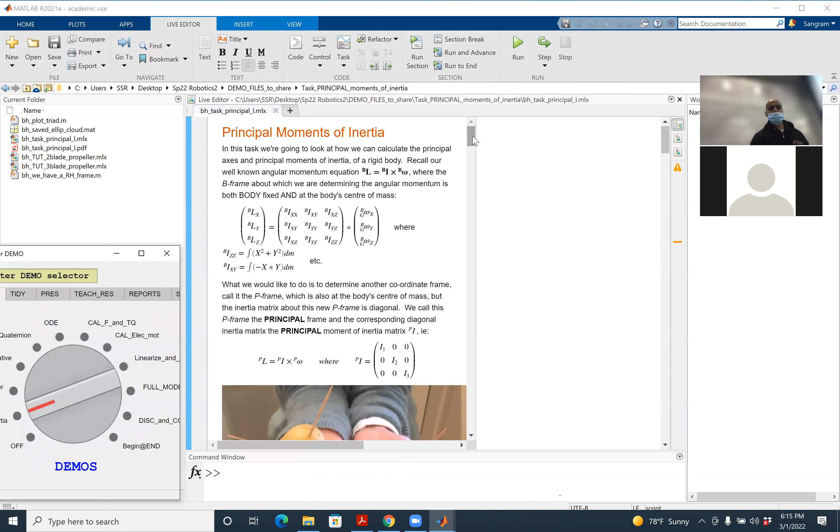This live script talks about the principal moments of inertia. So we have covered the inertia tensor. We have covered principal moments of inertia. And here is a nice sketch that talks about what do we mean by principal moments of inertia. There are two potatoes. One axis is aligned with the axis of potato, and the other axis is at an angle to the principal axis.

Now this live script, what you can do is you can interactively run. So what that means is if you go down, you can actually click here, run section, and the script would run onto the right-hand side. So you will see the equations for the moment of inertia. So if you want to find out the principal moment of inertia for an arbitrary object, what you do is you solve something called the eigenvalue problem. And then that gives you the principal moment of inertia.

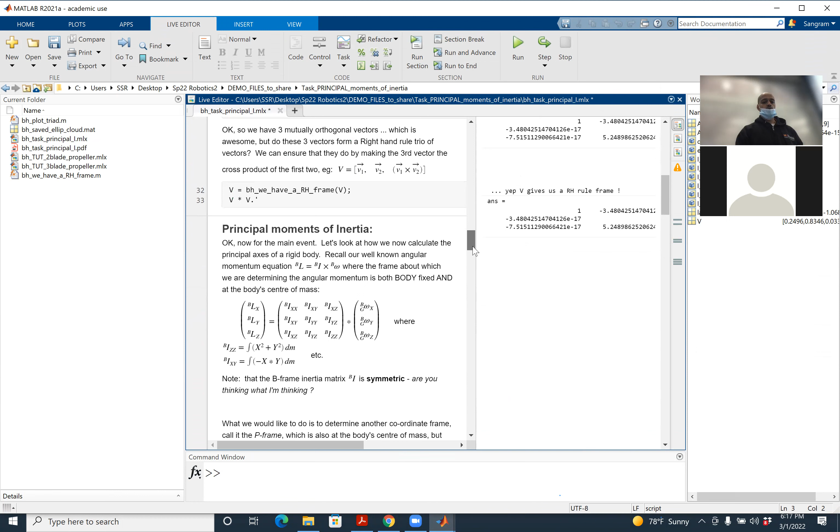And then if you go down, it gives you a little bit more information about the eigenvalue problem and what that is, what do we mean by principal moment of inertia. So this is talking about the frame. Another important point that I want to talk about, and I emphasize this when we discuss, look at the angular momentum equation. Angular momentum equation is the moment of inertia multiplied by the angular velocity vector.

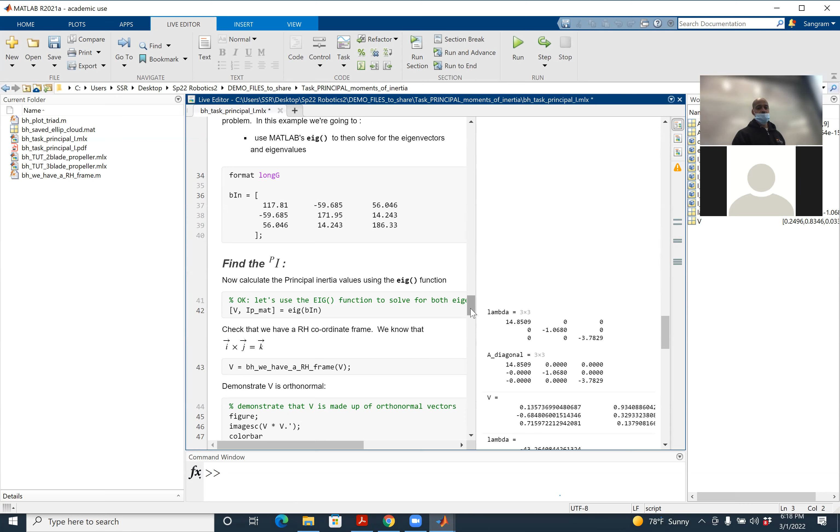So basically, if you want to try this in MATLAB, you can run this code in MATLAB. And there is an eigenvalue example. There is also another example. Remember the circle of vectors that I talked about, i cross j, j cross k is equal to i. All that information is encoded in the live script. And you can run these live scripts over here. And this also talks about the unit vector and other stuff.

Are you with me so far? Have you opened this? Is it on? No. Still extracting. Yeah, that's all right.

Now, if you don't like to watch this live script, actually there are movies also embedded. What you can do is you can go to reports, click on the principal inertia, and that will bring a PDF file that will give you the gist of what principal moment of inertia is, what is the application of principal moment of inertia, and all that stuff. Everyone understood this?

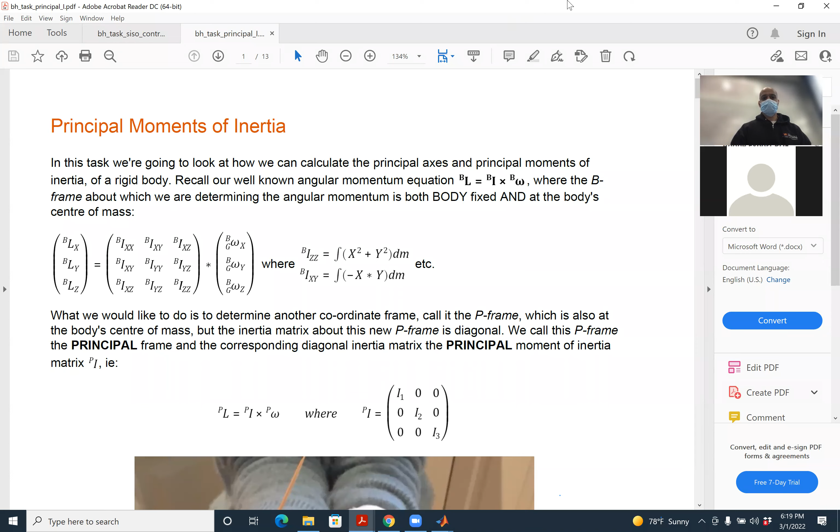So what else did we study? We looked at Euler angles and what Euler angles are. We talked about passive rotations. We talked about how rotations are not commutative.

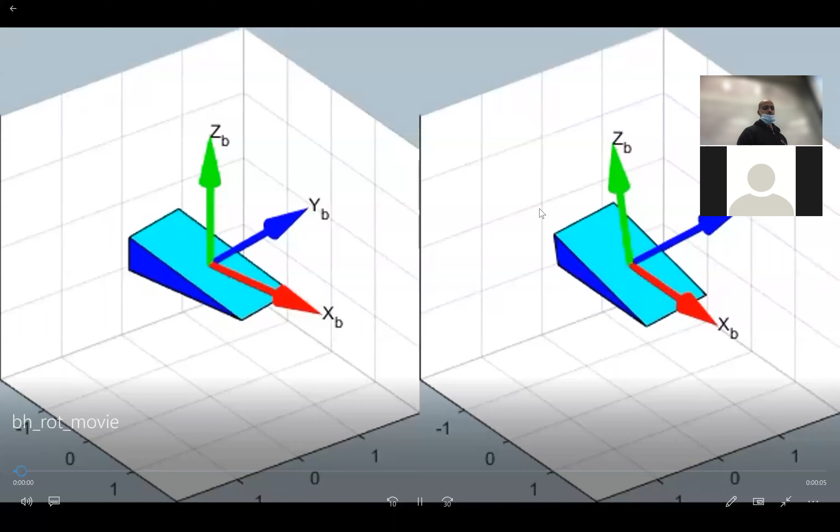So this script talks about what we mean by non-commutative rotation. There is a movie embedded in here. So basically you are applying the same rotations, but in a different sequence. The same rotations in a different sequence give you a completely different result because the rotations are not commutative. Are you with me so far?

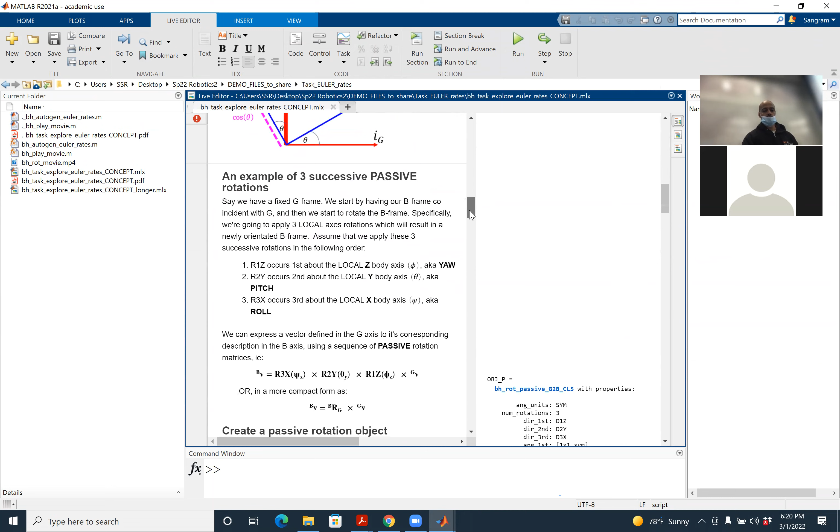Now, remember the transformation matrix that we talked about? In this live script there is code that you can use to create the rotation matrices. Remember we talked about Z, Y, X: rotation about the Z axis, rotation about the Y axis, rotation about the X axis. That takes us from the inertial frame to the body frame. So all the transformation is actually implemented in MATLAB.

And some of you may ask me, why are we learning this again? It is super important because towards the end of this lesson, you can actually take the Simulink code, convert that into C code and flash it onto a microcontroller. Before we do that, it is absolutely essential that we have an understanding of the math that is involved. And it's fun.

So remember all these transformations that we talked about: the rotation about the inertial frame, then the rotation about the middle frame and the rotation in the body frame. You are welcome to run these live scripts, and finally you would get the relations that we derived in the third class. So this is done in MATLAB. And then we found the relationship between the body rates and the inertial rates. And when the pitch angle is 90 degrees, the system becomes singular.

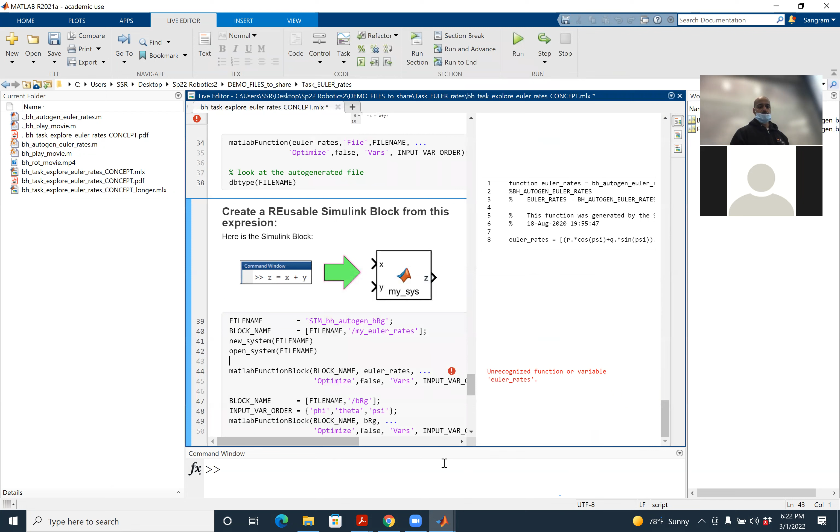So for example, this Simulink function will actually implement that transformation. Give it some time, it will take a while, but this will come up. So you are welcome to try this. So we looked at the rotation transformation, and this is what's going to happen later: we have this quadcopter model. It could be a Parrot Mambo, or it could be a Tello, or it could be a Parrot AR drone.

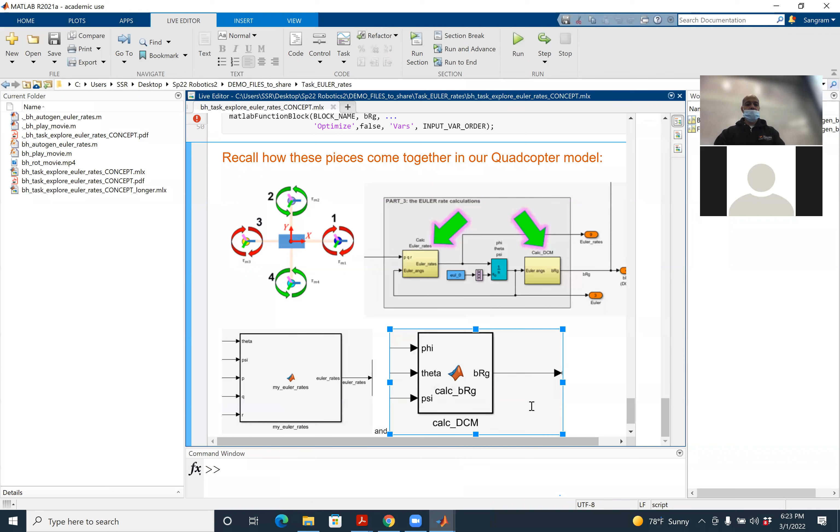What we have is a Simulink block, and we are going to get the roll rate, pitch rate, and yaw rate, or essentially the body rates, PQR, from the IMU on the drone. That information will get fed into the Euler angle transformation, and then we will use a direction cosine matrix transformation to find the actual roll, pitch, and yaw. So please understand, this is what your code will look like. You will have Euler rates, and then you will have a DCM.

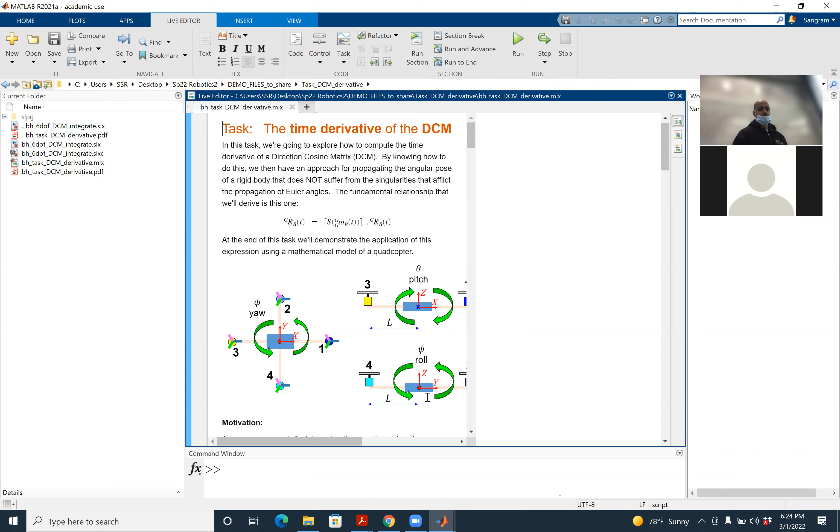The next part that we talked about is the derivatives, or how we actually find the angular velocities. For finding angular velocities, a simple structure is you have the yaw rotation, pitch rotation, and roll rotation. So we talked about those. We also talked about the transformation from the inertial frame to the body frame. Now here, the key concept is how you find the derivative of the rotation transformation, because the angles are also changing.

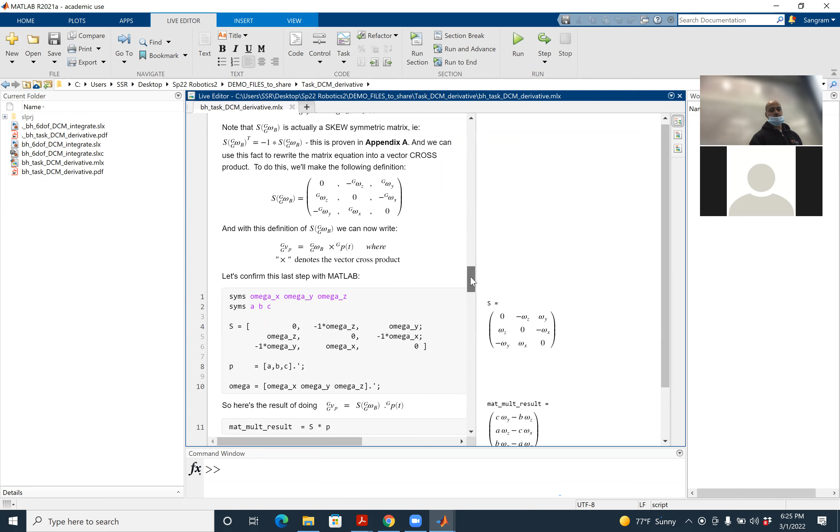And why is this important? This is important because when we apply Newton's laws, the equations of dynamics, we will have to use this information. And this comes with the cross product. So I would encourage you to run this script, and you will see the cross product of the transformation. And then finally, you will see the Simulink implementation. This implementation is going to go and sit in the drone. So please read through that and understand how this implementation is done.

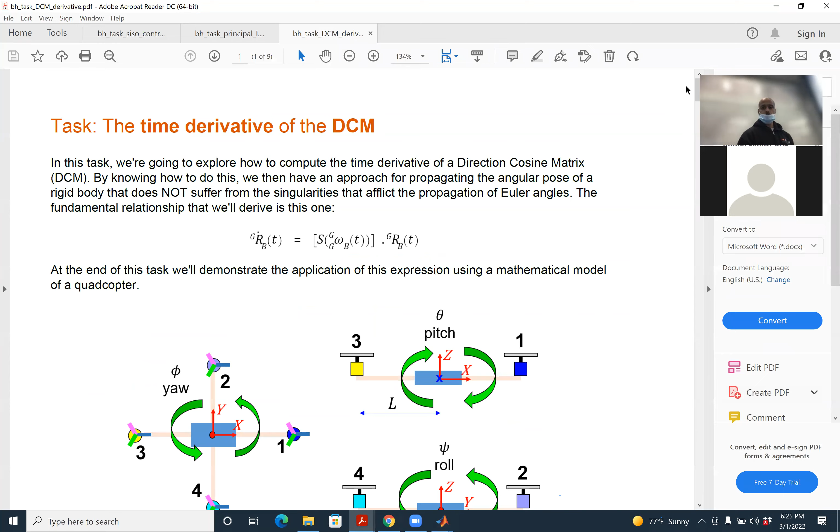So when you open this, it will talk to you about all the important concepts that are needed to run this. We did not talk about the quaternions, but really, if you want to get into flight dynamics, quaternions is the thing to work on. And the idea is we don't have to rewrite the code for quaternions. MATLAB already has the built-in block for the quaternion that we can use and implement the quaternion implementation.

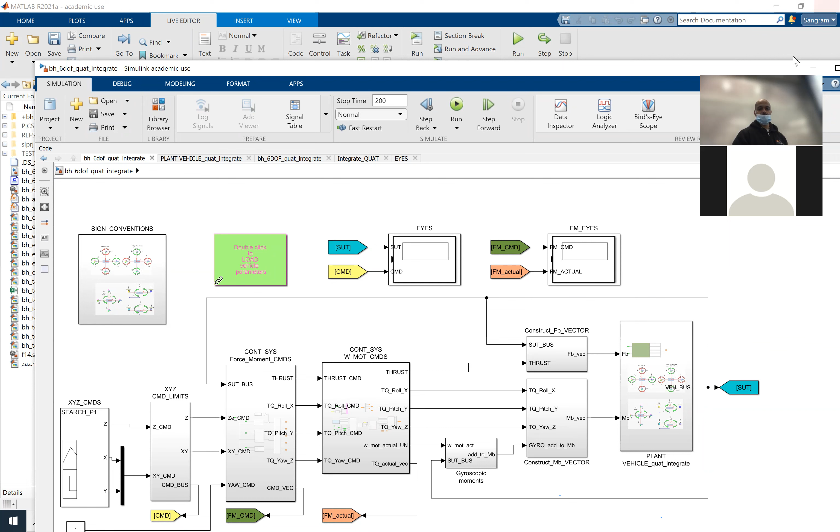So if you go down, you can actually open the system. So if you run this section, it will open this 6 degree of freedom quaternion block, and then you can actually use this in your code. So this is how that whole thing looks like. You have the sign convention, you have the reference value, you have the command limits, and all that actually goes to the plant. And we are gonna look at that in step-by-step fashion. So I would encourage you strongly to go through this and explore this architecture.

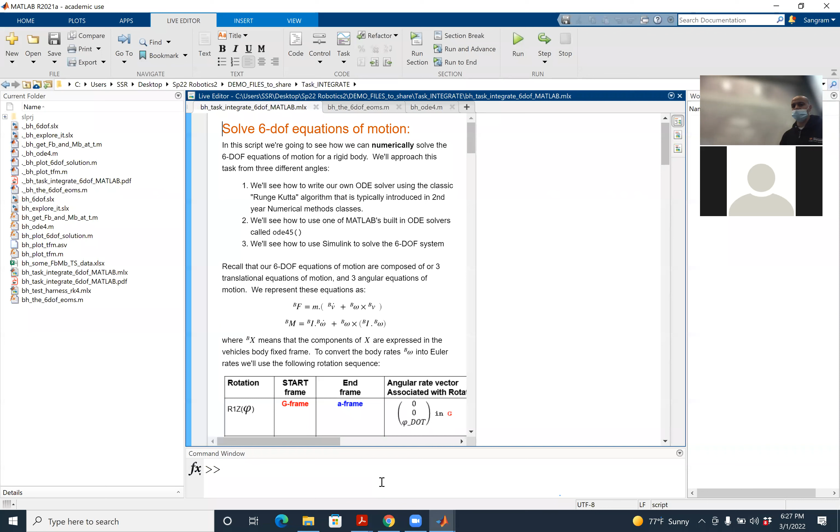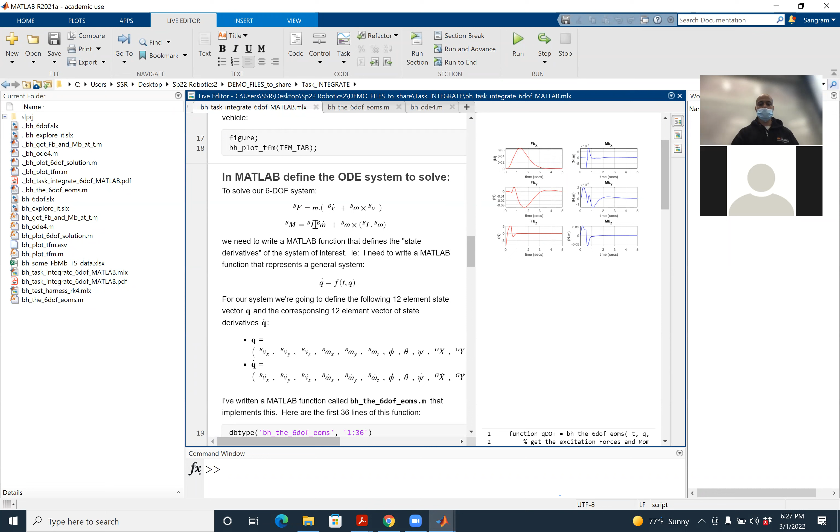Next part is the ODE part. And this is the crux that we spent a lot of time on. I spent 2 lessons talking about the differential equations of motion. This MATLAB script gives you hands-on implementation of what different frames are, how to use the mass inertial properties, how to get these properties in the body frame. Remember these 2 equations that we talked about, the derivative of vectors. So you have a force equation and you have the torque equation. And at the end, you have torque about roll, torque about pitch, and torque about yaw that are used to control the drone.

Now, this is the hard-coded Runge-Kutta implementation, which is the 4th order numerical integration. You can use this code or you can use the actual MATLAB code and then generate the results. And you're welcome to run these scripts. And at the end, you have the quadcopter model. This quadcopter model is implemented in a MATLAB function block in Simulink, which is the body Euler angle fixed mass, and you supply all the inertia properties for the quadcopter. This is super important. You supply the values of forces, Fx, Fy, Fz. You supply the torques, Tx, Ty, Tz to this block.

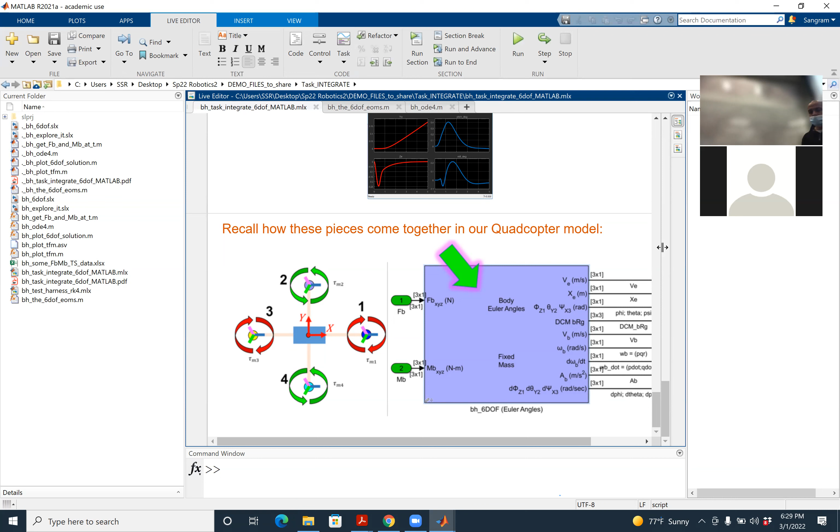And then on the right hand side, you are gonna get those 12 state variables. Remember velocity, position x, y, z, and then orientations and angular velocity and all that type of stuff. And that becomes the output of your simulation. So please run these scripts and that would make your understanding super clear.

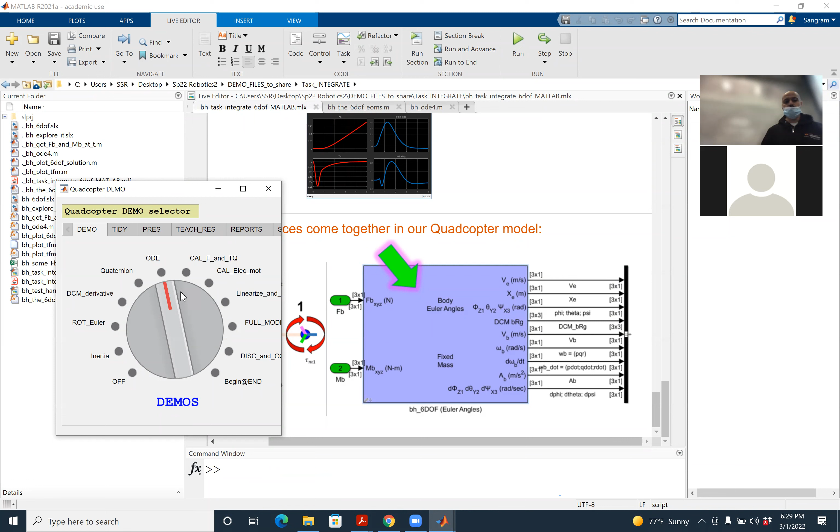The next part is, all this is great, but how do we find out the actual forces and torques? To find out actual forces and torques, we need to do some experiments. So we basically mount a prop on the motor, run the prop at different speeds, measure the thrust, measure the torque, and create an equation using some sort of regression that is used in our control algorithm. So please run through this code, and you can actually use the Curve Fitting Toolbox to find out the equations.

Now, I just want to tell you, this approach is so powerful. Let's say you decide, hey, I want to build a quadcopter from scratch, you can actually follow this technique. This is called model-based design. You can select the motors, do the step-by-step analysis the way we have shown, and at the end, come up with an autopilot for that quadcopter that you can flash on any microcontroller like Arduino or Raspberry Pi, or maybe some ARM processor, and you'll actually have your own quadcopter controlled with your own code. So I would encourage you to take a look at that. So the torques and the forces that we calculate from experimentation, and the experimentation is also discussed, will get fed into the Simulink file that we are constructing.

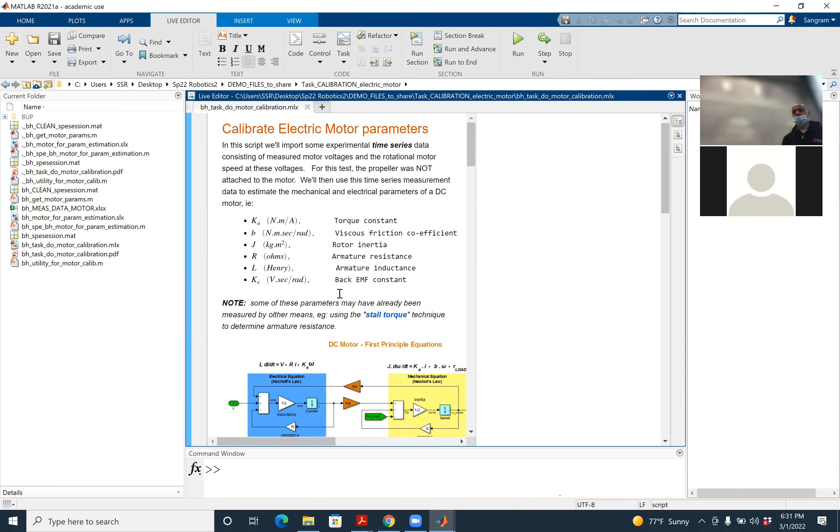Next part is the electrical motor modeling, and we spent some time on how the electrical motors are modeled. Electrical motors are modeled using the mechanical subcomponent and the electrical component. So these are the block diagrams for the mechanical component and the electrical component. And if you go down, please run this code wherein there is some experimental data that was collected from some motors, and then it shows you how to actually calculate those motor constants from the experimental data. So once you run this code, you can actually use this for parameter estimation of the motor.

The next part of this code is, we got this model. This model is a nonlinear model. It's very difficult in actual practice to control a nonlinear model. So what do we do? We simplify the model. And what is the process of simplification? The process of simplification is called linearization.

In Robotics 1, we talked about the process of linearization. I'll give you a very simple example. Sine theta is a sinusoidal curve. But as long as theta is less than 17 degrees, you can use the approximation sine theta is equal to theta. That is sort of the linear approximation of this nonlinear behavior. So you do something called linearization.

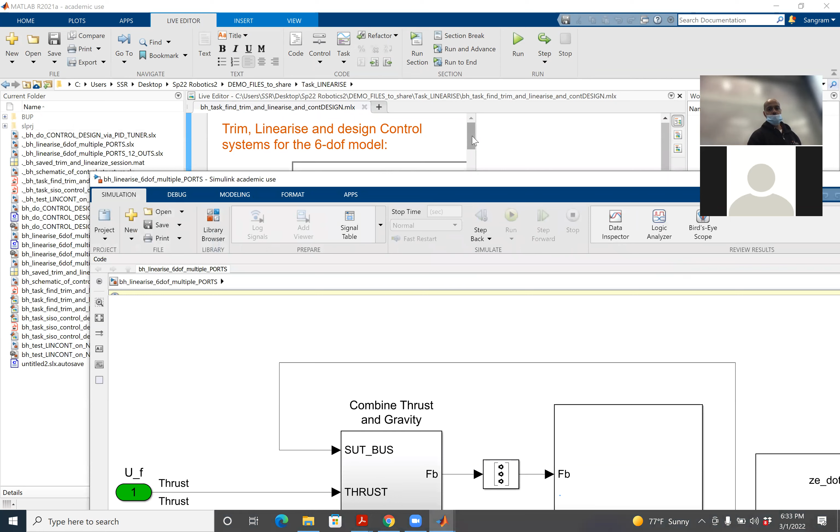PID control that we are talking about is a linear technique. So linear control may not control the nonlinear system over the entire range of operation, but linear control would control the nonlinear system in a subset of the operating range where the behavior is mostly linear. So I would encourage you to look at this, and in this model, we look at the aircraft frame.

So you can do linearization about a fixed point, or you can do linearization about a trajectory. So you can construct a linear model that is valid at say 0, or you can construct a linear model that is valid when the value of x is remaining say 1. So depending upon what you want to do, you perform the linearization. In the case of aircraft, a linearization about the fixed point does not make sense.

If you have an airplane, what do I mean by linearization about the fixed point? It means the aircraft is not moving forward, going upward, going downward. So the aircraft is stationary. That linearization is fine, but that is of no use to us. So linearization is done about an operating point, which means, for example, if the aircraft is in level flight, you would do the linearization when the aircraft is in flight.

Or if the quadcopter is hovering at steady state, you would do the linearization when the quadcopter is hovering at a non-zero z value. Everyone understood this? You can construct a linear model when x = 0, y = 0, z = 0, x dot = 0, y dot = 0, z dot = 0. But for a quadcopter or an airplane, we do linearization at some operating point when the aircraft is in motion. And that process is called trimming.

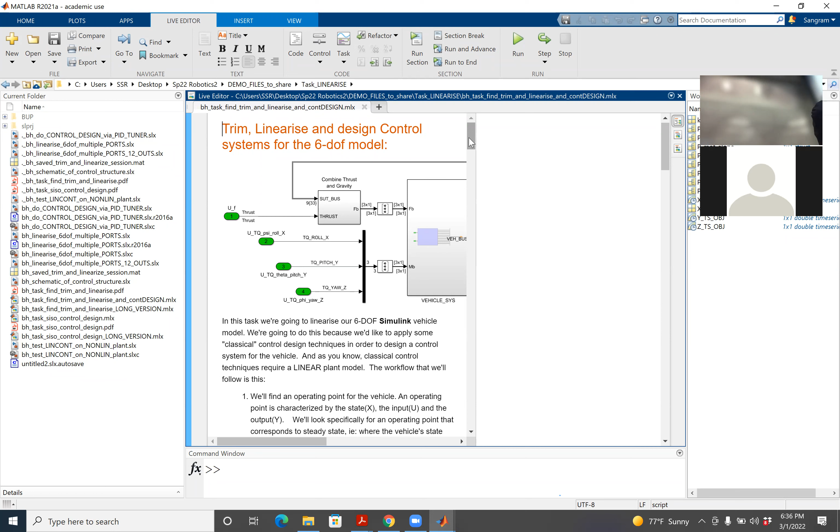Have you flown Tello? There is something called trim. Have you played with the trim command? So basically trimming means that if your Tello is hovering stationary and you trim it, it would stabilize the Tello at that operating point. So basically just look it up: trimming an RC plane, trimming a quadcopter. Trimming is stabilization when the aircraft is moving. So, constructing the linear model.

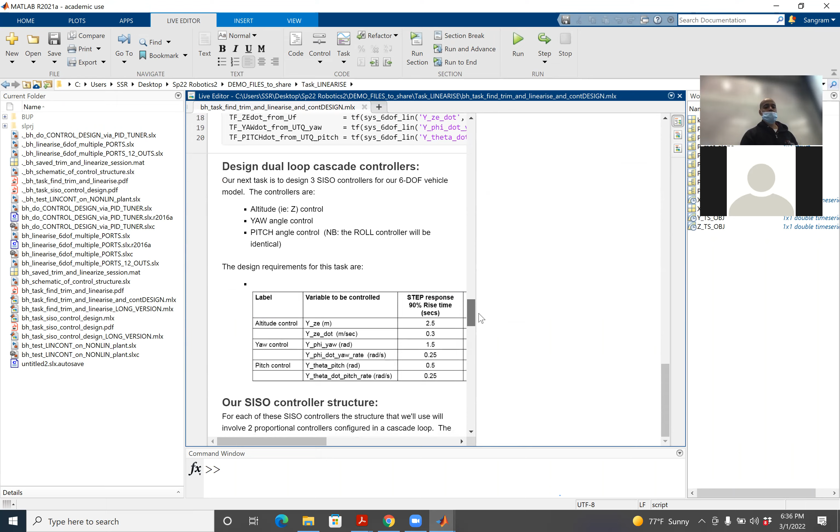Next part is how do you implement the control? If you go down, this actually talks about the same PID controls that we studied, the steady state model. How do you linearize a Simulink model? The command for linearization is linearize. And then it walks you through the process of linearization. Then you can find the individual transfer functions, or the relationship between the inputs and the outputs, and implement the control algorithms. I will spend some more time on this later.

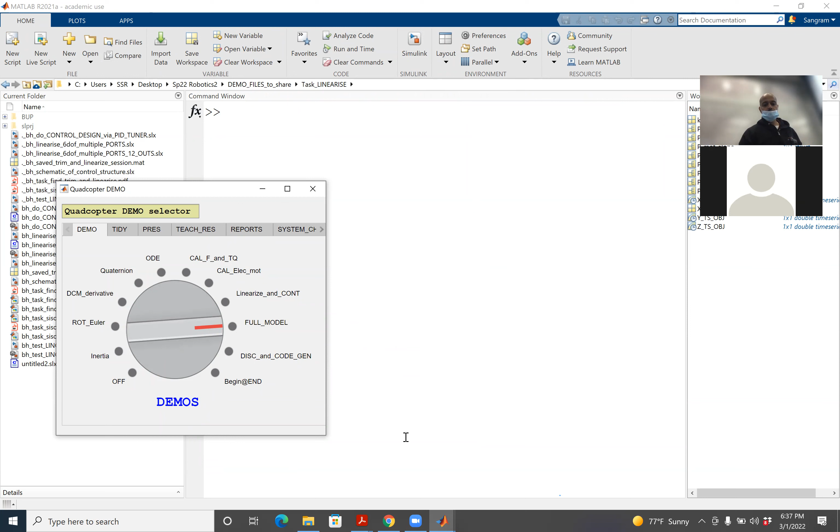But what I want you to understand is that this is the process of model-based design. And then you go for the full model where you have the linear control, but that linear control is implemented with the nonlinear plant model. And if you look at the nonlinear plant model, this is the big nonlinear plant model that you actually deal with. We will talk about this in more detail next class. But at the end, here is what happens.

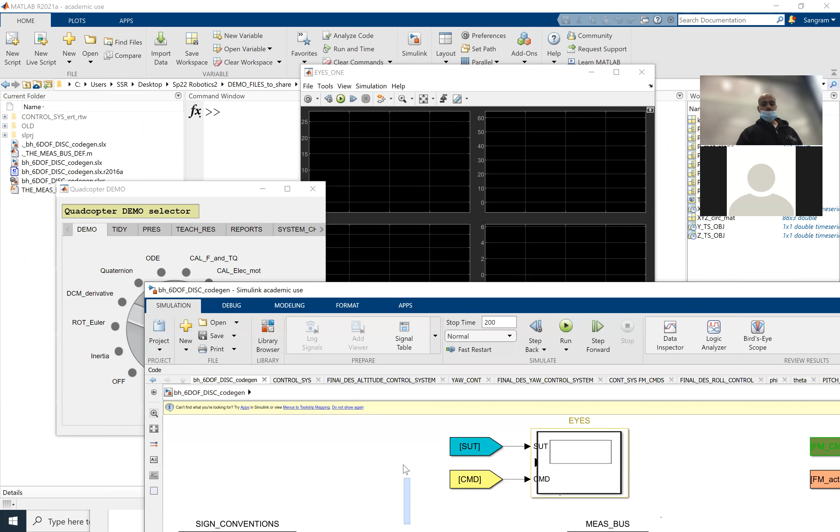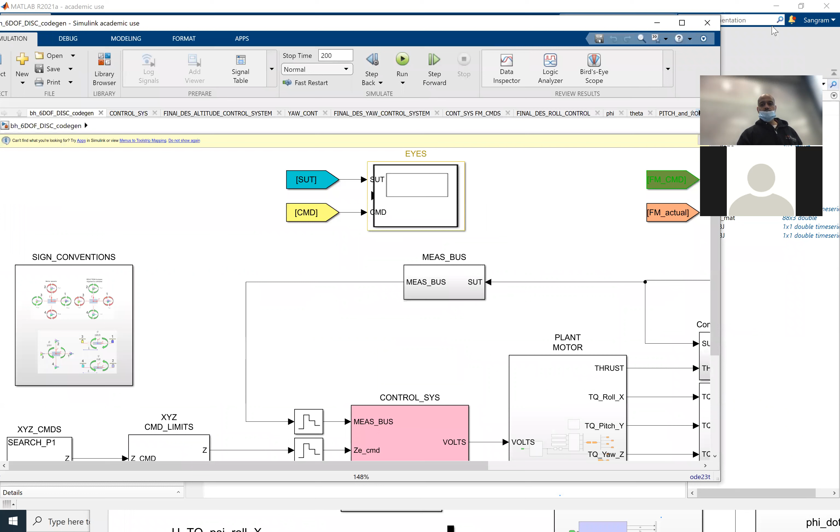Once you go to code generation, and I will show you in just a second, you will have to convert the continuous controller to discrete time. Why do you have to convert the continuous controller to discrete? Because a microcontroller is a discrete system. It's not a continuous system.

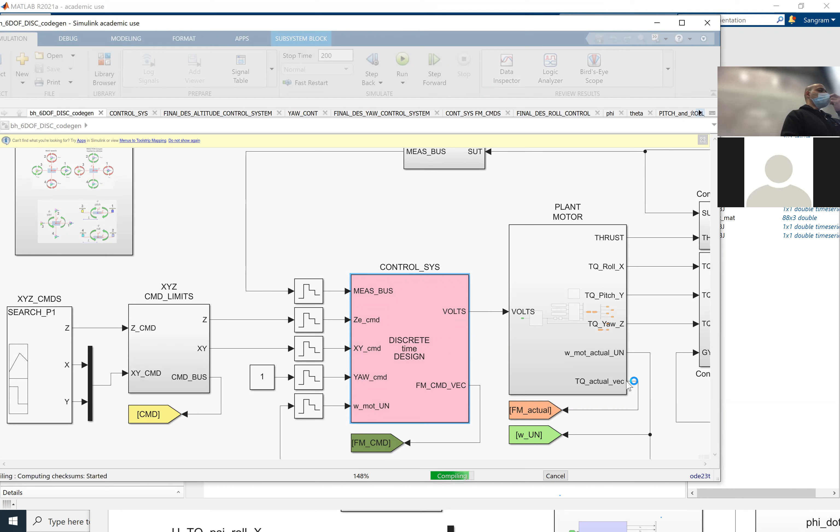So you take the controller block that you have designed, convert that into a discrete controller block, right click on this control block, and can you see C++ code? Then you can build this subsystem, and MATLAB will create the C code for you. And if you have the Arduino toolbox for MATLAB, you can take this C code and flash it onto your Arduino, and that Arduino will work like your flight controller.

So it will go through it. So the green line shows the update rate at 50 Hertz, because please understand, the microcontroller cannot run at the speed at which the simulation is running, because it's a CPU microprocessor. So once you run through this, it will actually build and create the C code.

I would encourage you to play with this simulation, and we are going to look at this again in the next few lessons. So with that, I want to start with Parrot Mambo demonstrations. First and foremost, Parrot Mambo. Have you had success in installing the custom firmware on Parrot Mambo?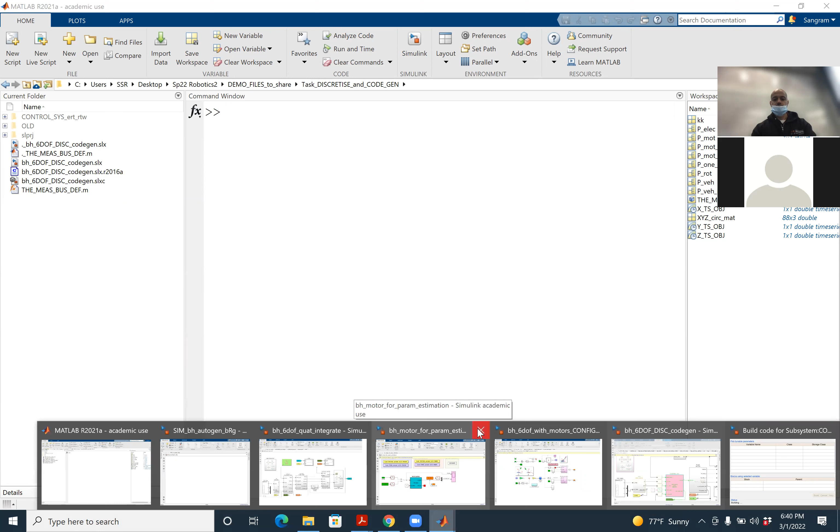So give me a minute. I'm going to minimize those windows. Okay. So step number 1, go to Simulink. Oh, MATLAB crashed. So go to Simulink. Online students, can you see my screen?

Okay, so go to Simulink, and in Simulink you should go down and you should be able to see the Simulink support package for Parrot Minidrones. This is what you should be seeing. There is the flight simulation template, the hover Parrot Minidrone template, and the code generation template. So just click onto the code generation template.

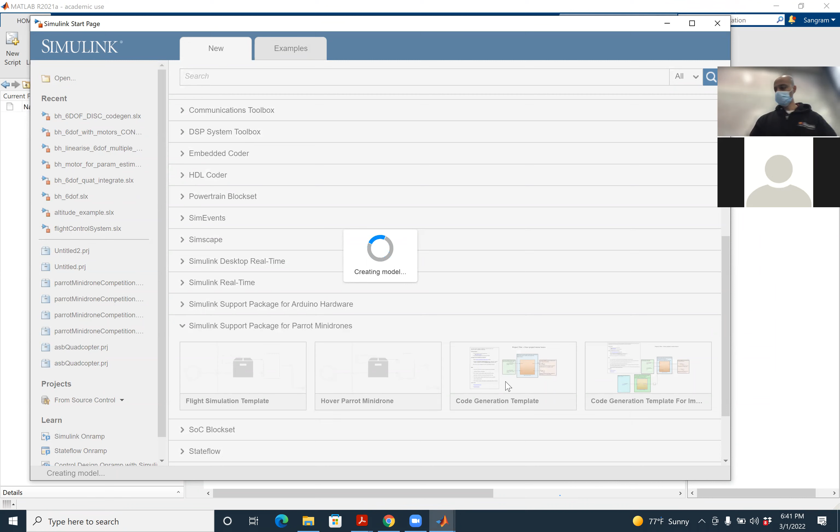Now this is the hello world of Parrot drones. Before you run any code, this is the first code that you should run. So what are we going to do? This is the Parrot drone that I have. Please don't connect your Parrot drones yet. Let me show you the demonstration and then I will give you time to do it.

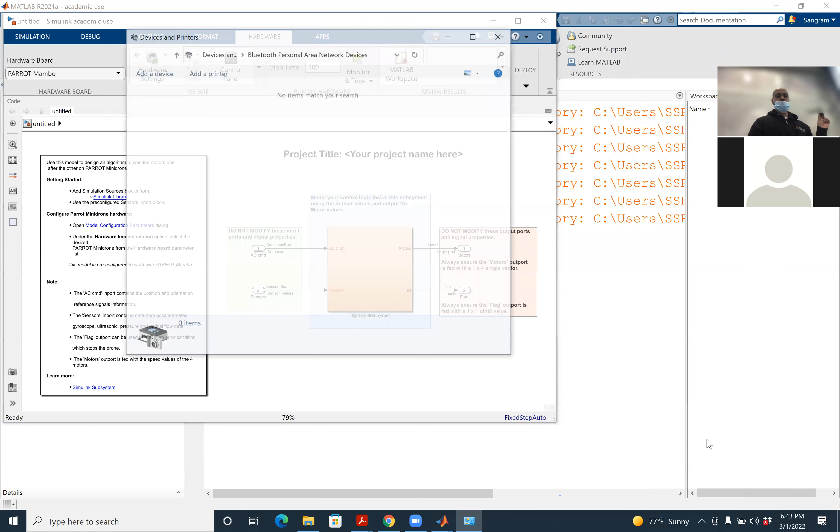So first, we need to connect a personal area network with the Parrot Mambo. How do we create the personal area network? Power on Parrot Mambo. Assuming it has the correct firmware, the eyes will start blinking. Go to Bluetooth, right click, join a personal area network, then add a device. So it found a device.

850160 is the same code as on the Parrot Mambo, which is in its serial number. So please connect to your own drone, not to anyone else's drone. How do we check? Connect using access point, and you should see connection successful. Everyone with me so far? Once the connection is successful, you should go here and say build, deploy, and start.

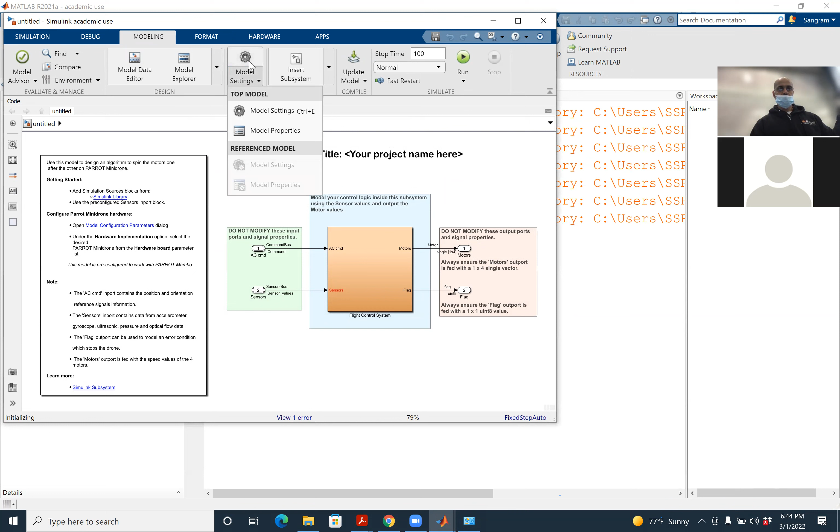So once you do, what did I do? You have to go to Modeling, model settings with the gear icon. Click on the gear icon. Hardware settings, hardware board, and OK. And now we can see him working on labs. You're awesome.

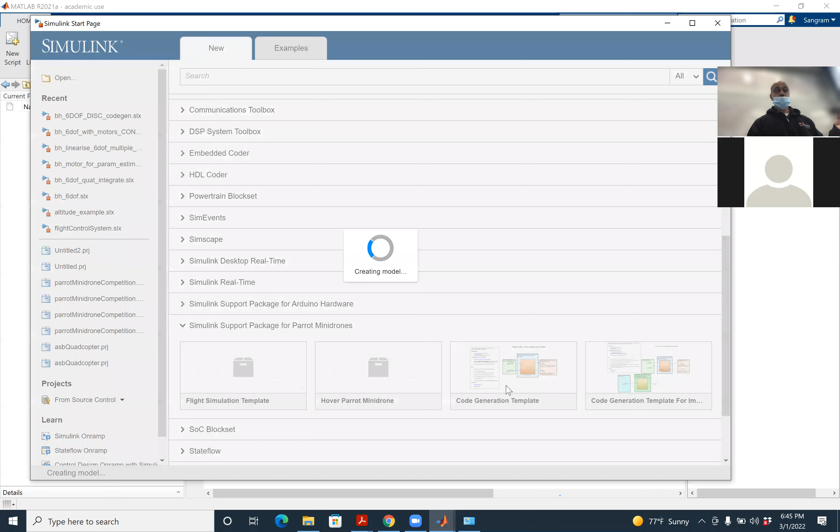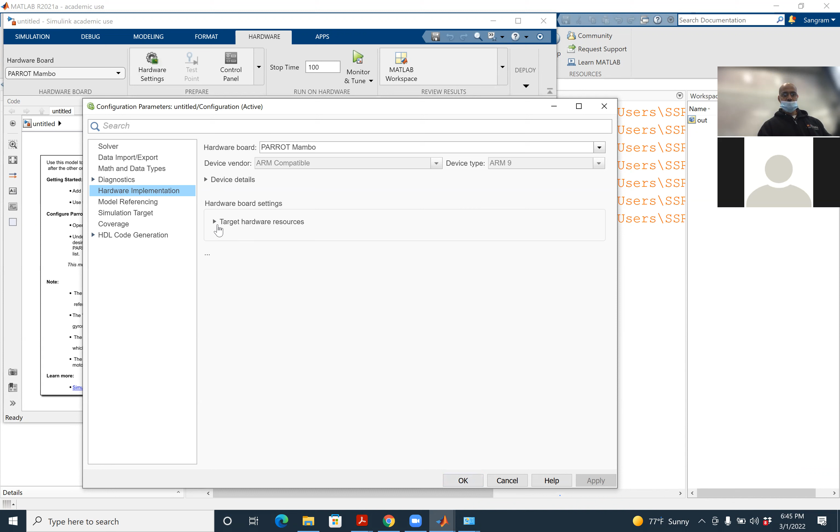So basically, I would go to hardware, deploy. Oh sorry, we forgot to tick something. Parrot Mambo ARM compatible. Let me see if it is still connected. Oh, it's connected. Click on the three dots over there. Go down and click use Simulink Coder features.

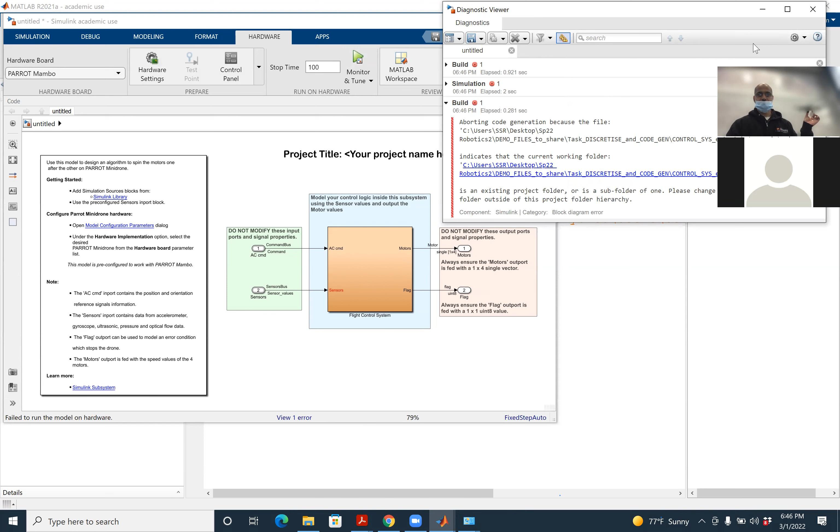And then deploy. Click on both, apply, okay. So if this doesn't work this time, then I'm going to pull my own code and run it. No, pull out your own code. So just click open system, Parrot getting started.

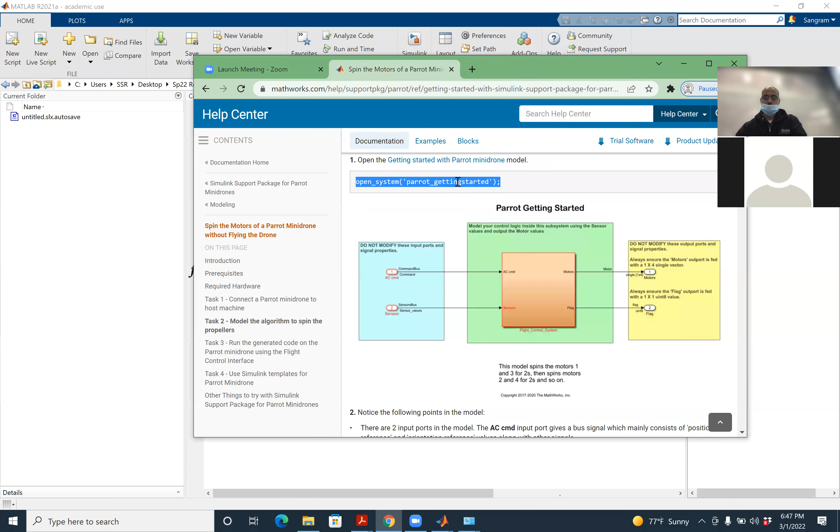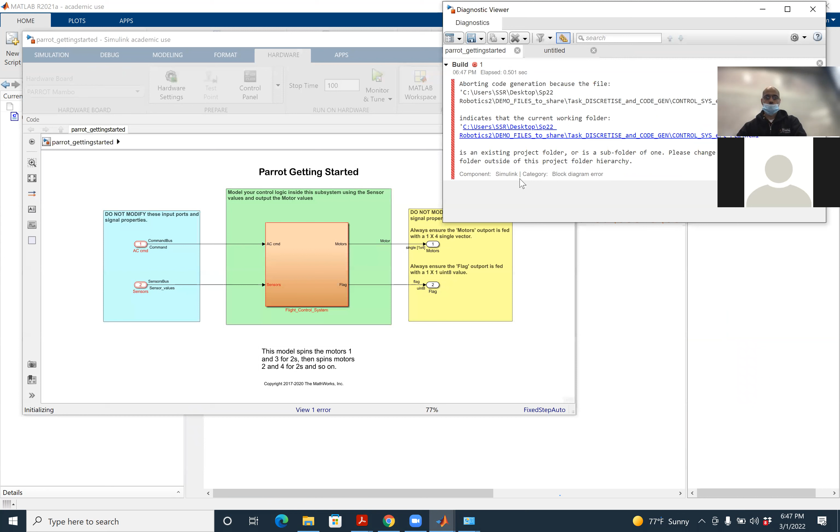So, yeah, actually, I did the code generation earlier. That's why it conflicted. So let it open. It will create the tool chain. Then you can go to personal area network. Just make sure that it's connected, and then deploy. And deploy and stuff.

Yeah, so what happened was in the last set, when I was trying to show you, I used a Simulink coder, and actually I ran the coding. So that's why those files were in the cache. So it didn't work. But now give it a minute. It will actually run. Can you see it gives me ready? Working? Okay, just a second.

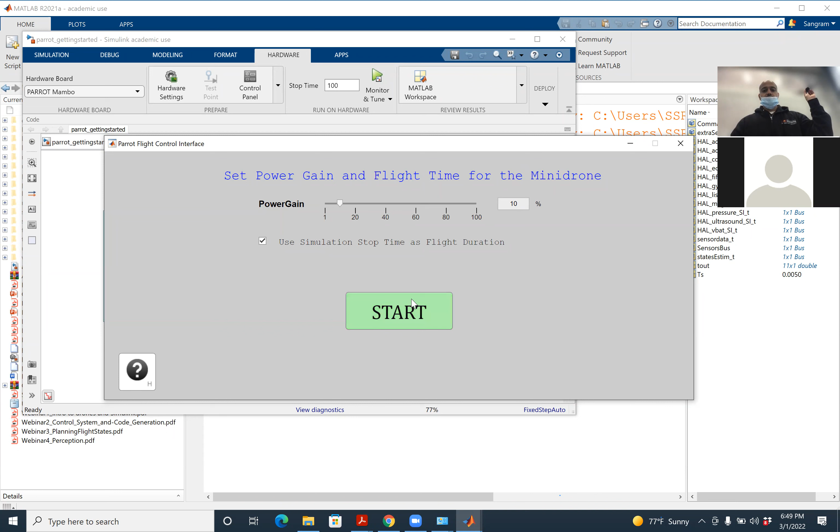There are two things here that I want to talk about. You can actually use the simulation stop time, or you can specify the time, like 10 seconds, 50 seconds, 30 seconds. And then what you do is, don't run it at very high RPM, high speed. Just click start. And it will actually rotate alternatively. It will spin alternatively. Can you see?

There is a much easier way that was given. Much easier way. Like it's just one line play. Yeah. So probably it would work. Then what you can do is you can look at the flight log, and this flight log will get downloaded to the current directory. So you can actually see the flight log. I would encourage you to start this.

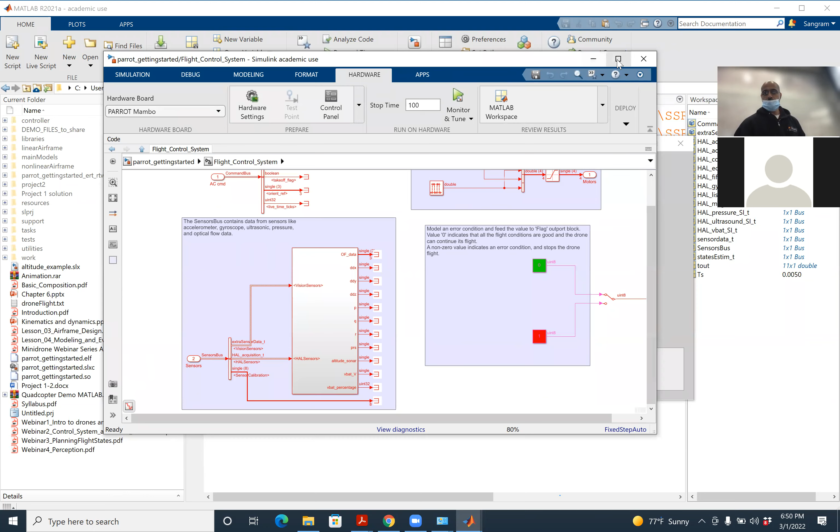Let's quickly look at what this code is about. So this code is about getting the motors output. And I want you to actually look at these different states. So you have DDX, DDY, DDZ, PQR, altitude, battery percentage, etc. What you can do is you can modify this code, something like this.

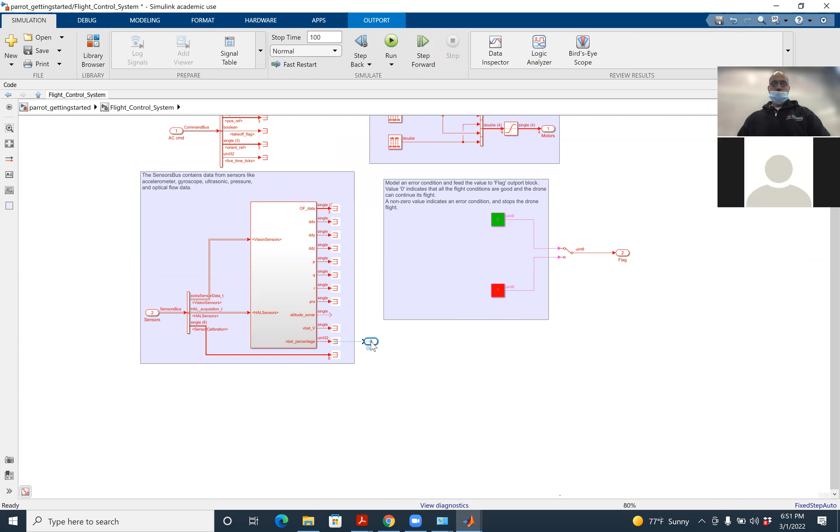For example, you can take this altitude, remove, go to Simulink, library browser, commonly used blocks, and go on to the out. So you will have this out. You can actually connect this to here. So this altitude sonar can be connected over here. Now, what does that mean?

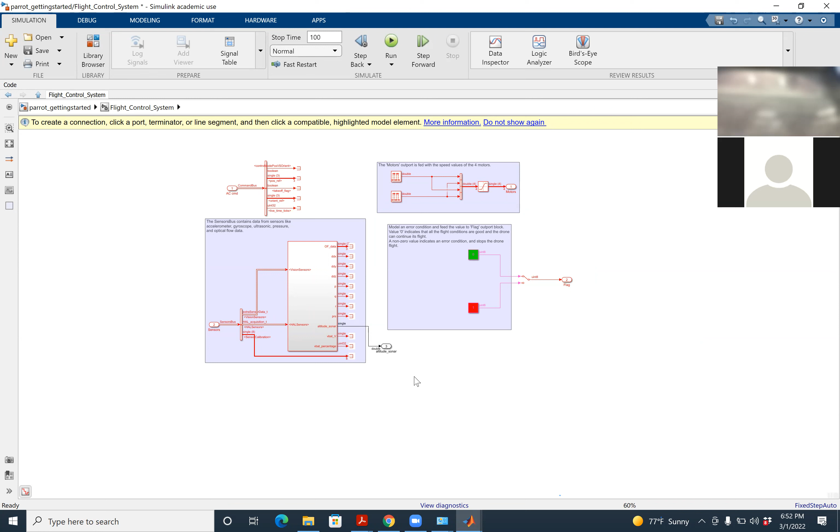So Parrot Mambo has an ultrasonic sensor. That ultrasonic sensor is going to measure the altitude based on the reflection time and the speed of the ultrasonic or the sound wave. Go here, and can you see here there is altitude sonar. You can go to simulation, go to Simulink browser, grab the scope, put it over here, connect this scope to the altitude sonar, and now again deploy the code.

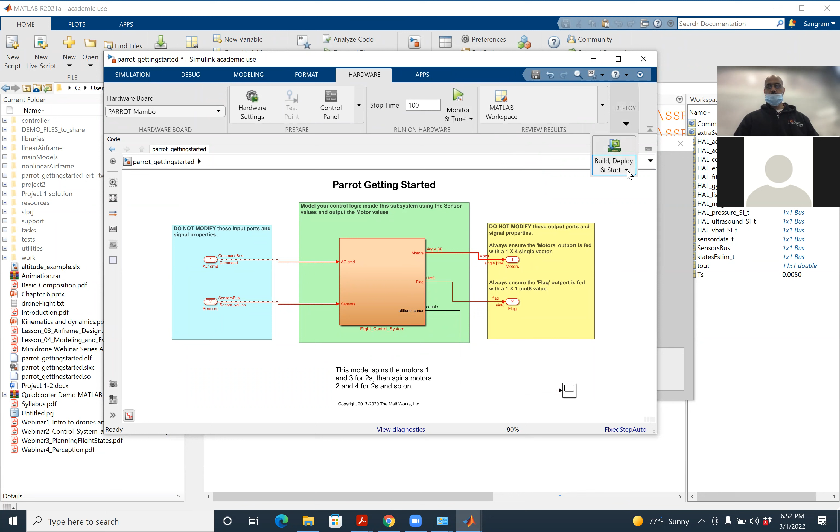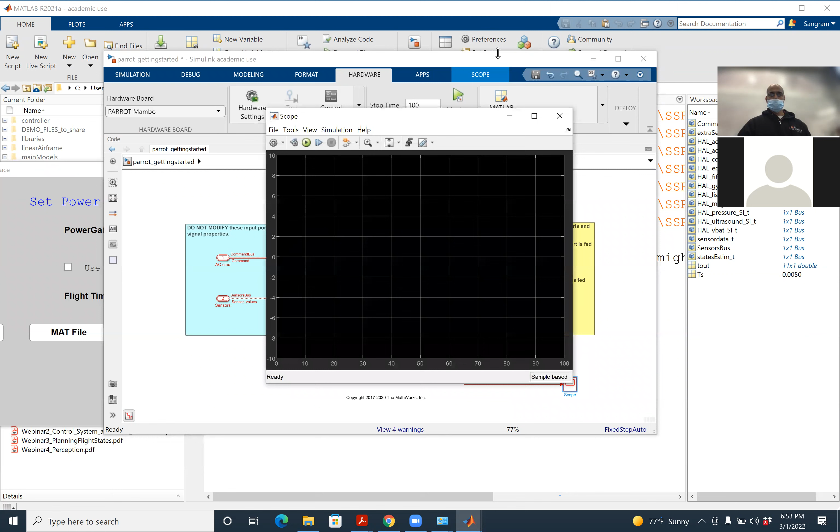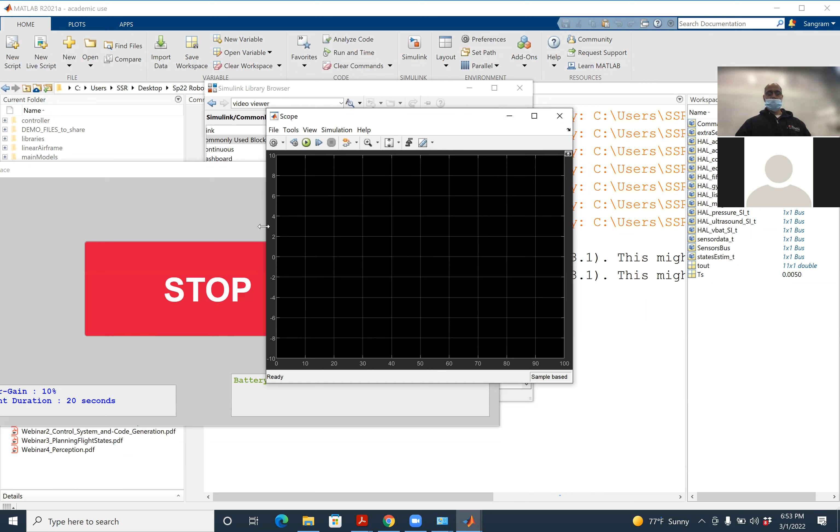So basically hardware, deploy and start. The code will compile, code would get flashed onto the drone. You can open up the scope, open the scope here, and then you can actually start. And then you will get the output here. So probably you need to click the external variable. I'll just show you how it runs.

The next thing that I want to talk about, and that is a little bit important, is go again to Simulink. Go to Simulink support package for Parrot, and there is this Hover Parrot mini drone. So Hover, I'm gonna call this Hover class.

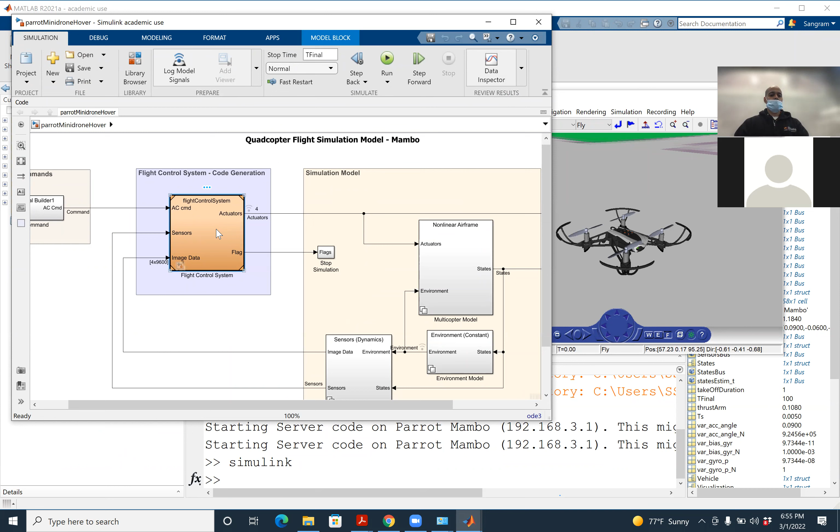So now what I want to show you here is, this is the quadcopter simulation model. And in this quadcopter simulation model, this is the flight control system. This flight control system, if you double click, it has the image data, vision-based data, command reference that goes back to the flag. You have sensors, you have the image data, and, this is very important, you have the signal builder.

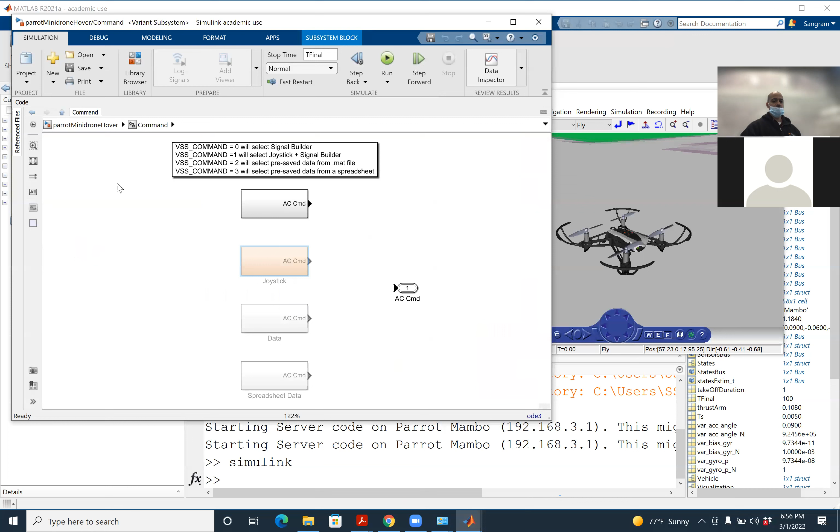So what you can do with a signal builder is you can connect it to the joystick, or you can connect it to the AC command, or you can actually build a signal. So for example, check this out. Double click on the signal builder and see what is happening. X is at 0, Y is at 0, Z is at minus 1.5. Please note, minus 1.5 is going up because north-east-down, Z is going down. So minus 1.5 is gonna go up.

Satvik, you might wanna sit back.

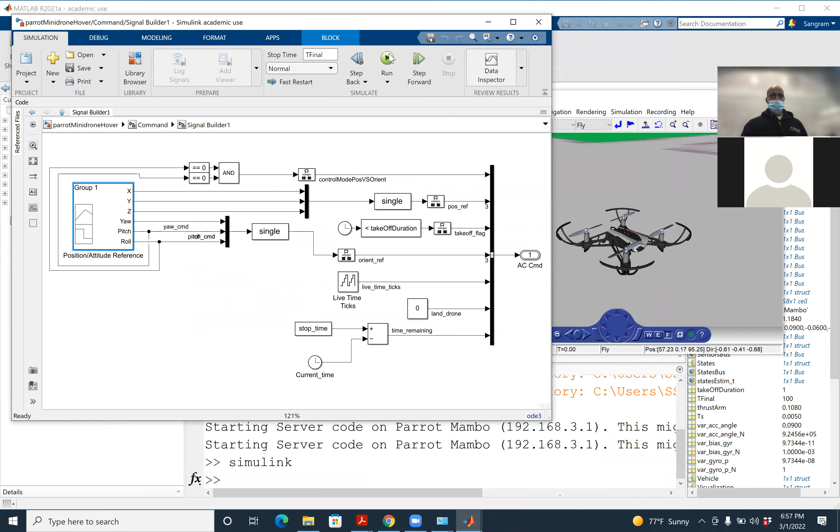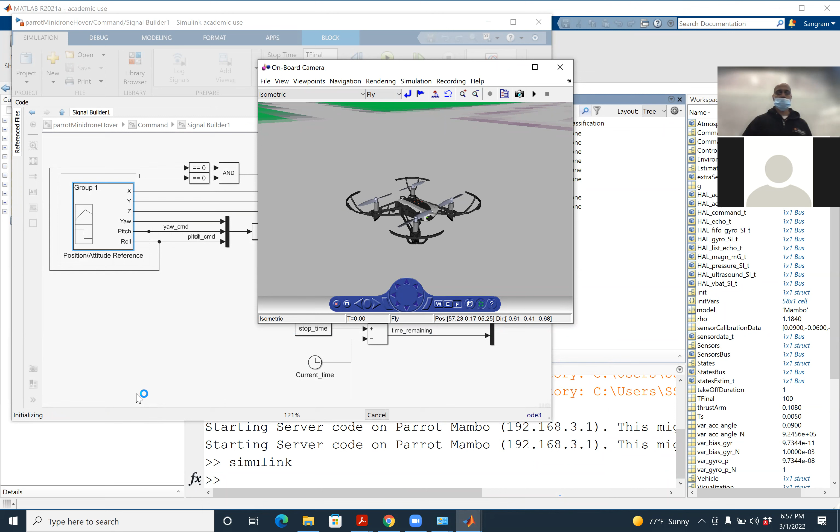Now what you will do is, you can actually run this simulation, and I want you to observe what happens in this simulation. So it will actually run and it will show you on screen how the quadcopter is supposed to behave. It can go to minus 1.5 and start hovering. So you'll see that in just a second. Can you see that the quadcopter went on to minus 1.5 and started hovering?

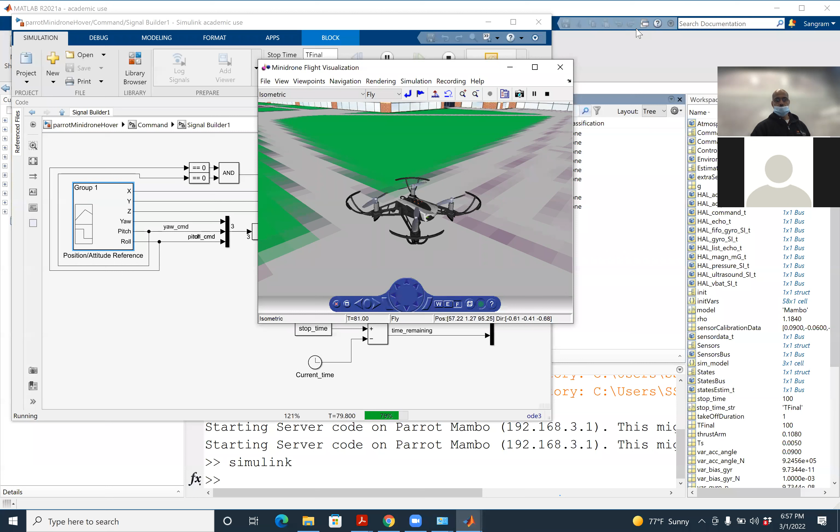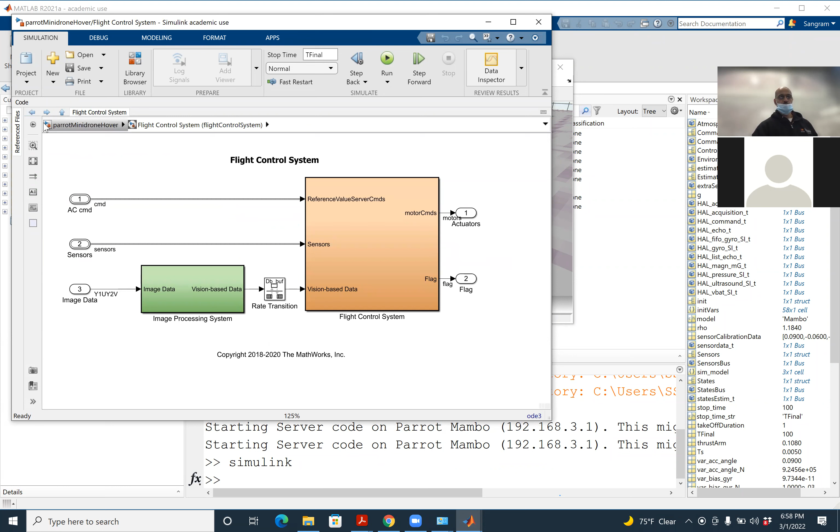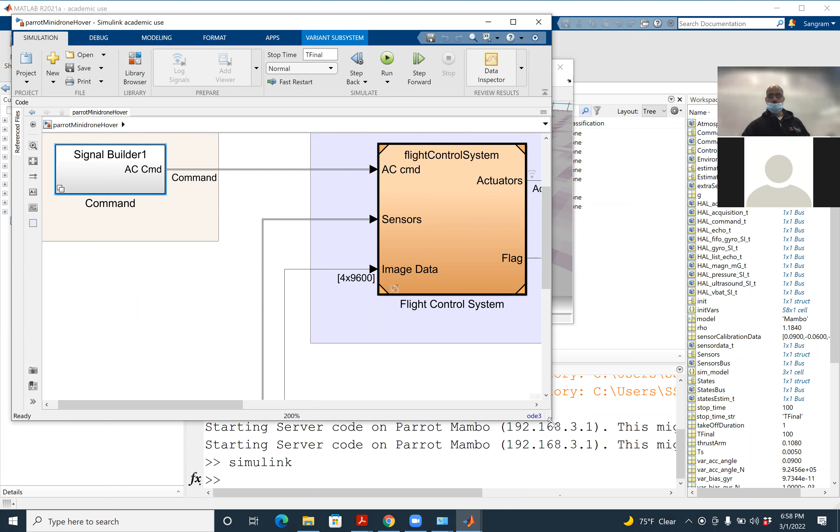Now what I'm going to do is, this is the model that we have built. Now I'm going to stop this. Stop this. Go on to the project. So back. Flight control system. So we will go to the back. parrotMinidroneHover. And now what I'm going to do is, I'm going to flash this code onto the Parrot Mambo drone. So bear with me just a second.

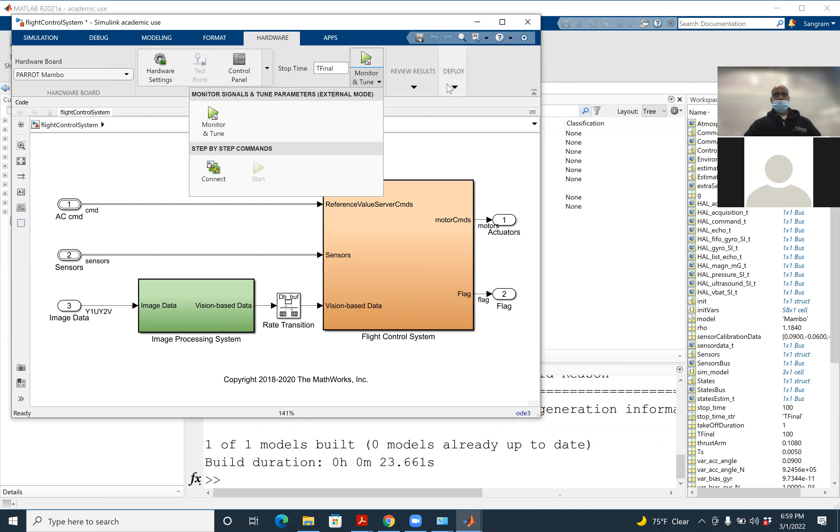So I would go here. I would actually generate code. Then I would actually deploy. So that code that we actually saw in simulation is actually being built into C and Hex file, and it will be flashed onto the firmware. It's wirelessly being flashed.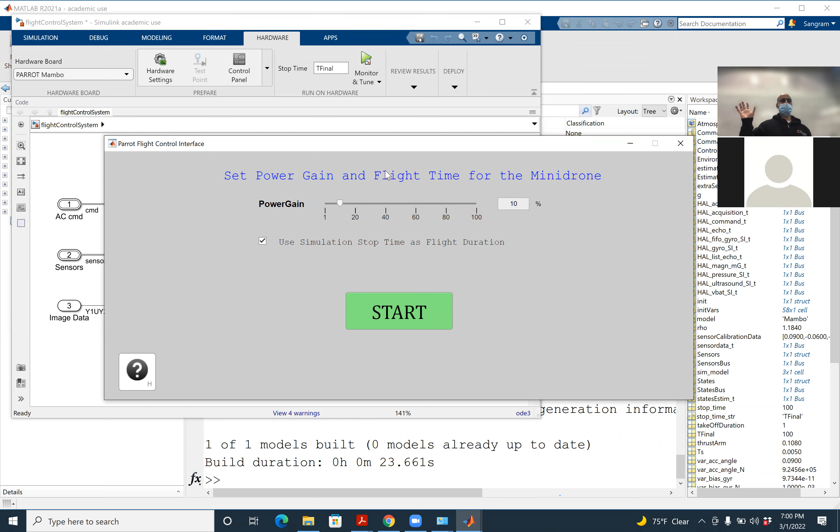And assuming everything is successful, you would see that familiar screen for the takeoff. This is the screen that you should see. That means the code built successfully, code got flashed successfully. Now let's see. That is what happens.

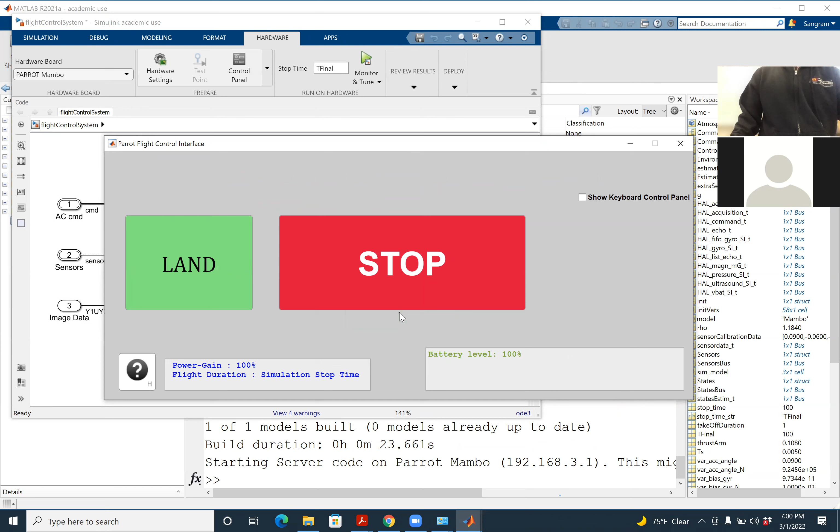Online students, you are missing all the fun.

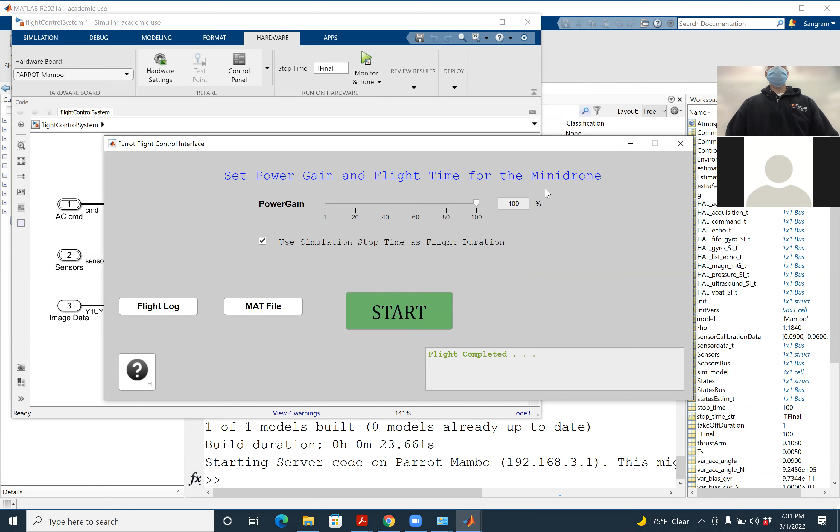Then click land. Stop. Now, if you want to make changes, what you can do is, you can also go. So I just want to tell you, remember the line follower algorithm I talked about, or the code for tracing I talked about? That algorithm would fit here.

So what you would do is you would do XY translation, get the image, do the thresholding, and then set the parameters so that basically it's tracking that color. So when I say line tracking, first I would draw a blue line and then make sure the drone is tracking that blue line. Then actually I will convert that into a triangle and make sure that the drone is able to transition.

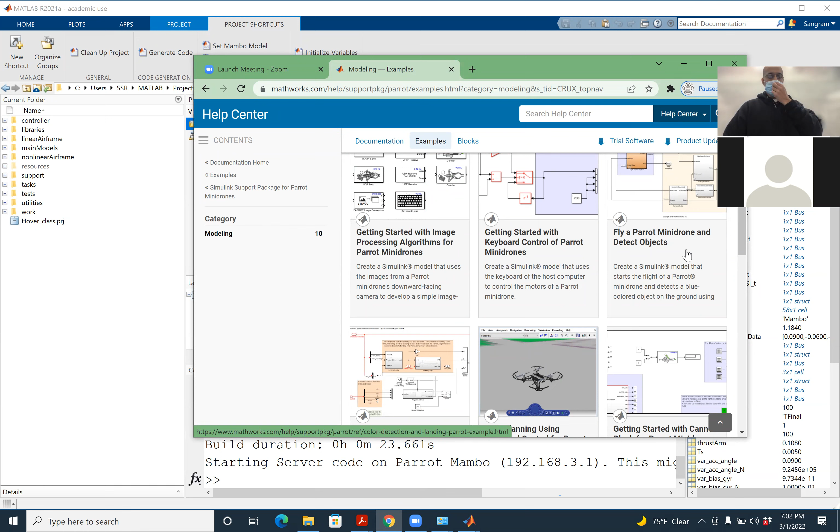The other thing that you can think about is if you want to go back to the code, this is the blank code, but there is a sample code which is called MATLAB competition. I'll show you where that is. MATLAB examples, go to Parrot Mambo examples. There is, you can deploy this code, Parrot Mambo to detect objects. Actually, you can also do the waypoint. You can do the path planning. And there is a code for MATLAB Parrot drone competition.

So basically, there is a built-in code that you can use. So Parrot mini drone competition start. Okay, good. That's what I was looking for. Thank you. Parrot, small m. Capital. Mini drone. Garbage.

So this big file would open and you can actually directly deploy this guy onto your Parrot mini drone. And what it does, it basically tracks an L. So you can actually modify this script, the code to make it track circles or, yeah, actually I would have problem because I already have a flight control system SLX in the memory. So I will have issues, but so it won't close because right now,

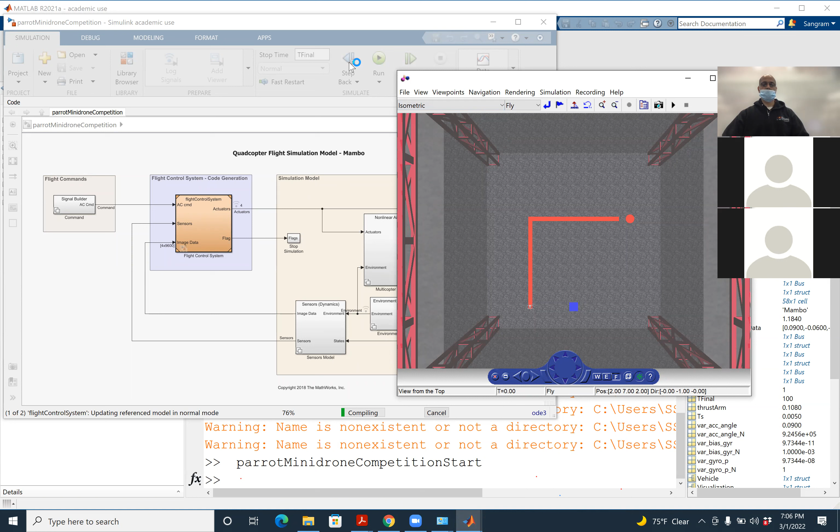So first, what you can do is you can simulate. Let that code open. So what you can do is you can simulate and view from quadcopter camera. Isometric. Yeah, it's running. It will run. This actually is a very good piece of code.

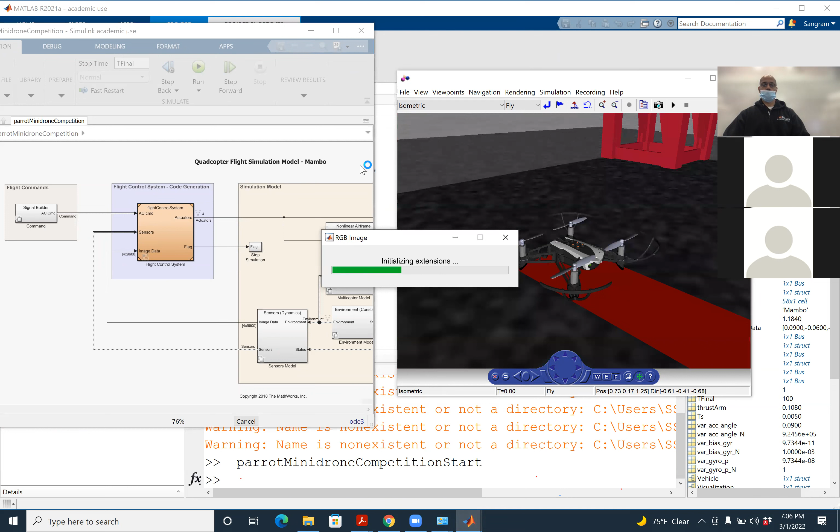Okay, and if you need some help, Tatwik, will you be here? Tech 162 Friday. Okay. They're not paying me. Hmm? They're not paying me. Knowledge.

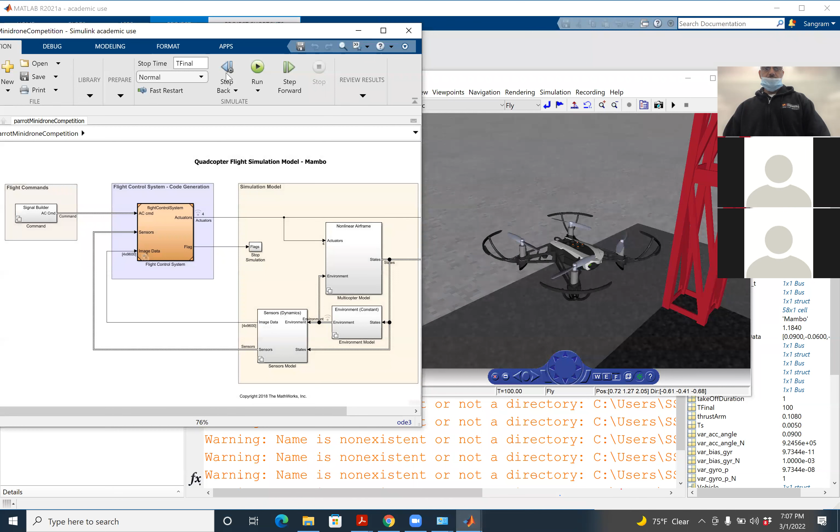So this is the simulation. Okay, you can deploy this whole code, generate code. Yeah, and then basically you can deploy this code onto the Mambo model, and then it should work. Okay, so I need to stop this. Stop the simulation. Stop. Go back. Go to the project. Set Mambo model. Then generate code. Set Mambo model and generate code.

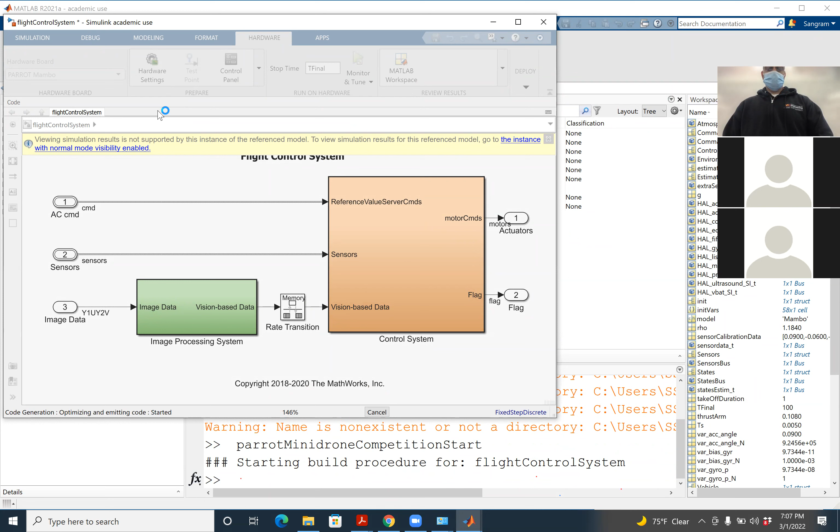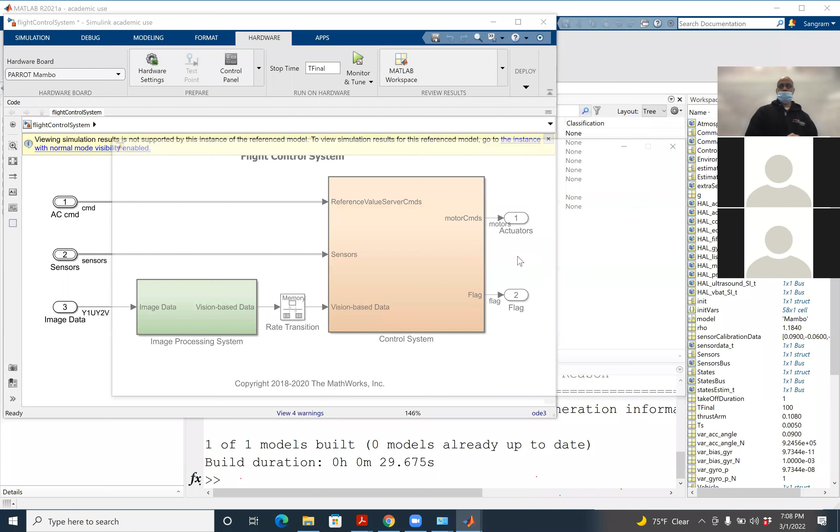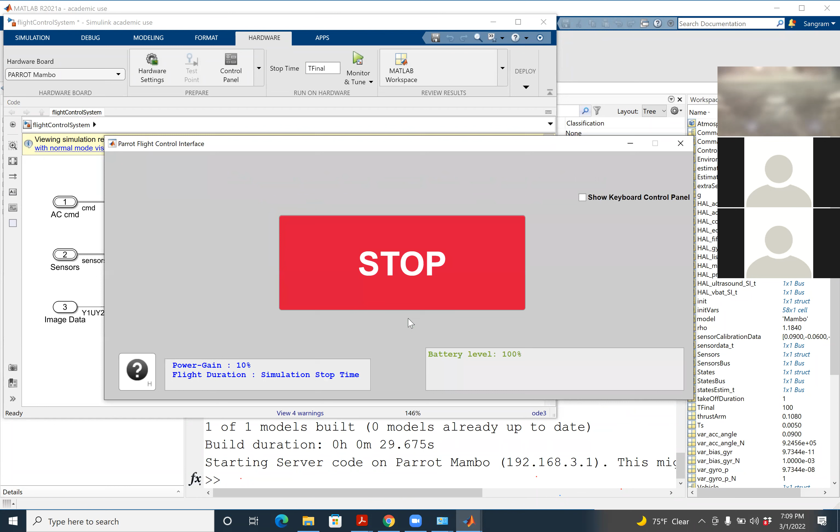And assuming the code works, the same interface would come. So what I'm going to do is start. So now it stopped because there is a fail-safe logic that tells the drone that when the drone is not actually flying, it will stop the motors. So basically it stopped. Now what I'm going to do is, let's see if this works. Can you see error detected in altitude?

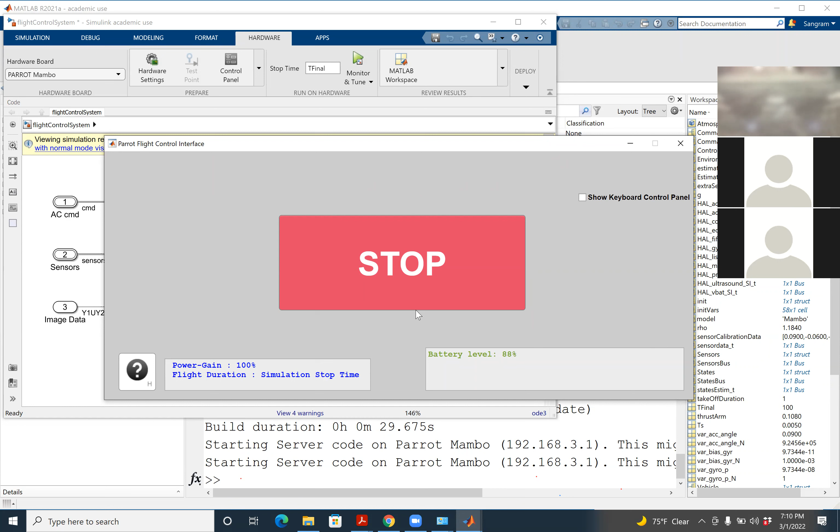I told you, don't sit there. So it's trying to detect for the blue. Okay, be careful. Of course. So you are welcome to, that's why I asked for everyone to wear safety glasses. Something like this will always happen.

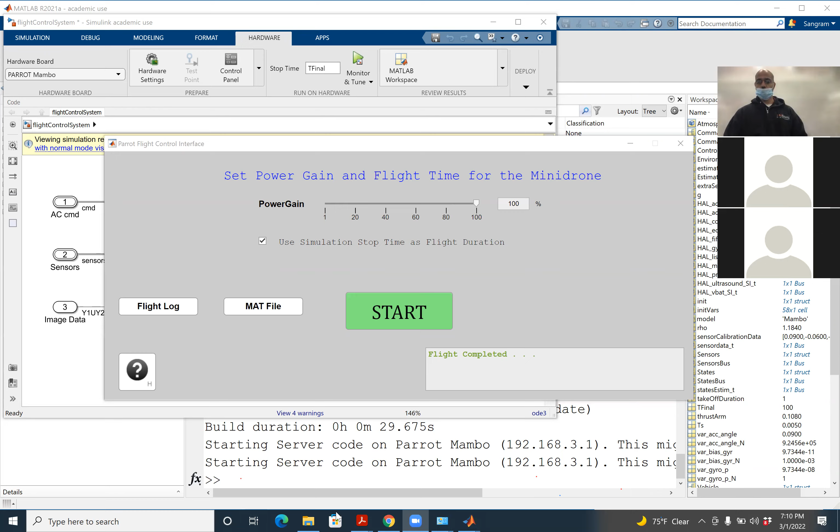So the Parrot Mambo that I got from eBay, one of the motors doesn't work. Is there any way that... Yeah, you can contact that guy and ask him to send you a replacement. Yeah, so the thing is, it's not showing up on eBay anymore. Even if I click on like find orders and stuff, I couldn't find it. That dude is here. Yeah, just tell him, send him a picture. Yeah, just tell him that you got it, it's not working.

And one more question for the final project. I was planning on taking the machine learning one for the fire detection. That has to be a group project, right? Yeah, it has to be, Aerospec project, has to be a group project. So, do we get to contact Aerospec? Yeah, next week. Because I need some data for the machine learning. So basically, you have to sign an NDA. All right. So next week? Yeah, after spring break. Thank you.

Professor, do you want this? I'm just going to throw it away. I ordered it. It's missing a sensor. If you look down here at the bottom, it's missing everything that goes in there. There's no power button. Where did you order this from? eBay. Same seller? I believe so. So just ask him for a replacement. Give it to him and ask him for a replacement. Just email him and tell them that I'm part of Dr. Edgar's class and we ordered this and this is missing this. So send us a replacement.